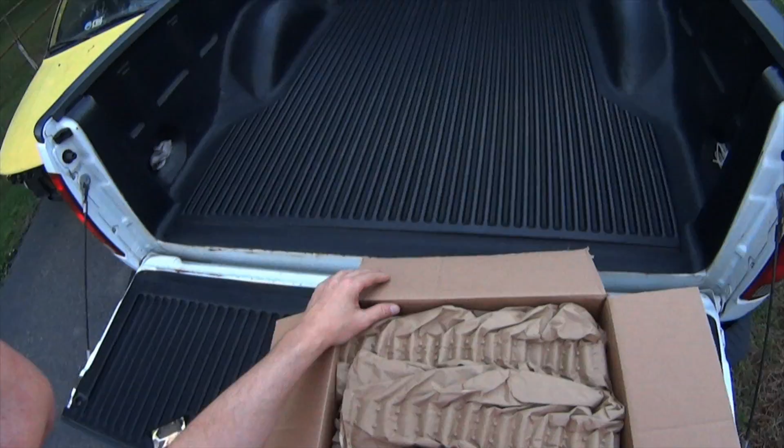The last video ended when the tape drive in my main production camera failed. The solution I chose was to ship it to the manufacturer to be repaired properly. It wasn't cheap, but it wasn't anywhere near what I was expecting, and it was less than a quarter of what this thing would have cost to replace. I'm really excited to have it back, and so is Caboose, because it means more wet food.

My estimate came in a week earlier than quoted, and the repair also happened a week earlier than quoted. Because of the expedient manner in which my repair was handled, I'd have paid any price just to get back to making videos again.

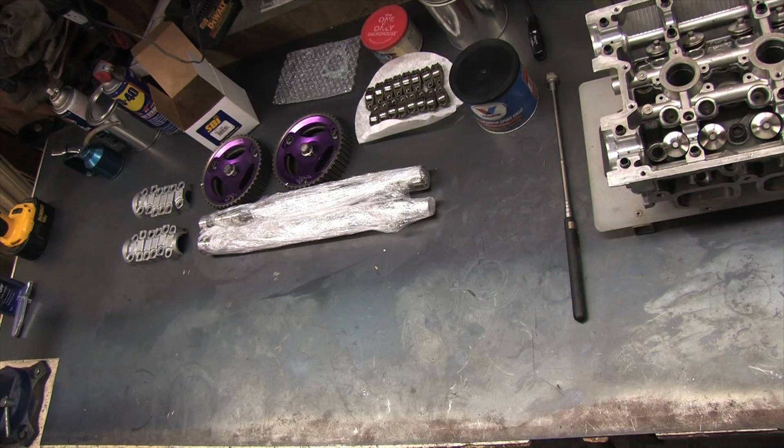The first matter of business, though, is to see what I can salvage from the 2 tapes I shot prior to the failure. This footage is what remains, and I've decided to go ahead and use it despite its segmented nature.

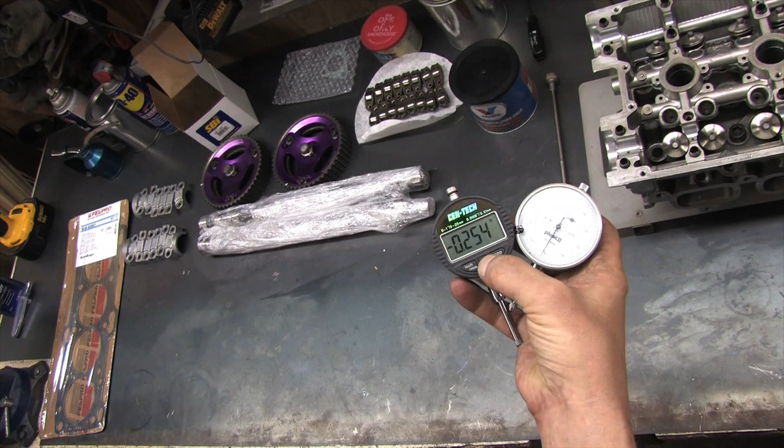I was laying out some parts and tools I was going to use for several upcoming tests, like my Felpro Permatorque head gasket, a couple of dial gauges, some straight edges, some feeler gauges, a digital caliper, some magnetic stands for the dial gauges - I have a few different kinds - and a set of test springs from the local hardware store. I found these to be a perfect fit over the valve stem seals, only 1 pound of pressure each. I'm saving them for another video though.

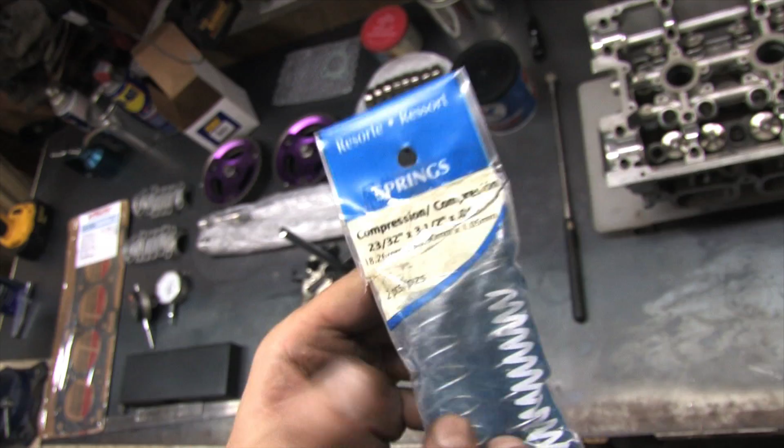Don't ask why I've got Romex and dikes. Builder's choice, I guess. You'll see soon enough. I've got my crank pulley, and it's useful for what we're about to do.

Can anyone guess what this imaginary part might be? Because it's not here yet, I'll save it for the next video. Make sure you have your crank pulley bolts cleaned up and ready to go.

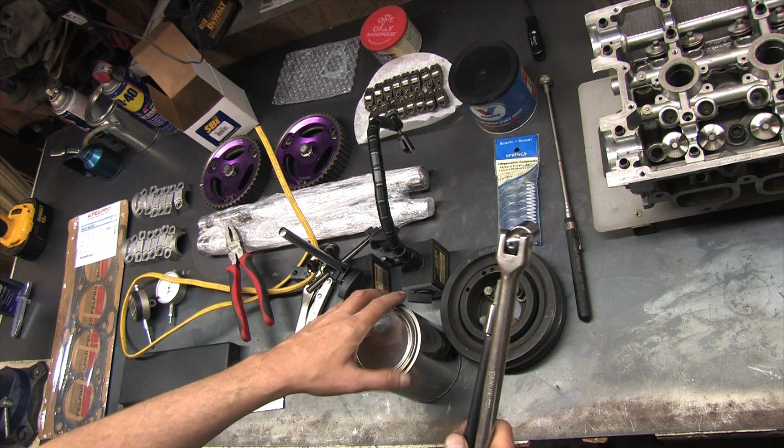In the next video, we're messing with head bolts, so I've got a 10mm Allen head socket that fits the factory bolts. If you're messing with a 6-bolt, this is another tool you have to own. Grease? We don't need no stinking grease.

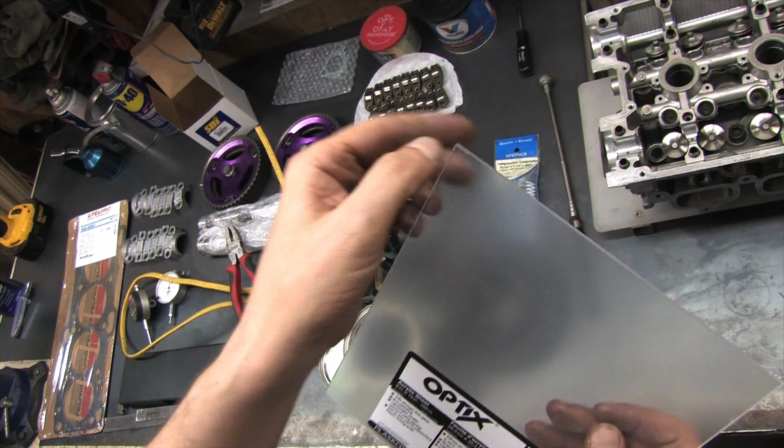I also bought a piece of plexiglass when I bought the springs, but then there's this particular item picked up from the aviary aisle of my local pet store. They wouldn't put this on it if someone somewhere didn't use this for the wrong hole. I just need the graduated syringe, that's all.

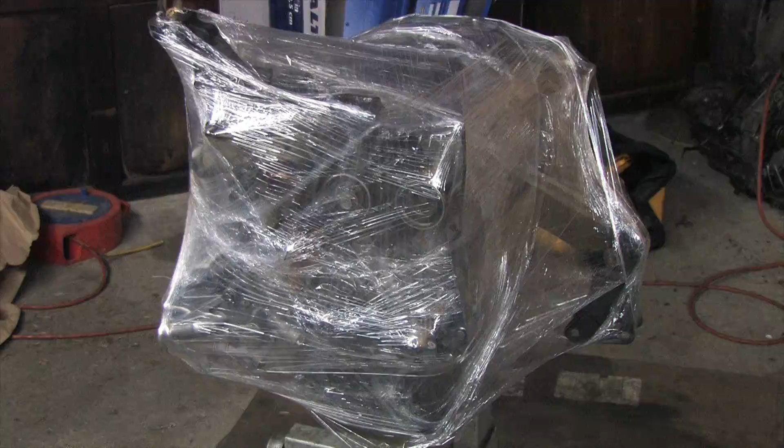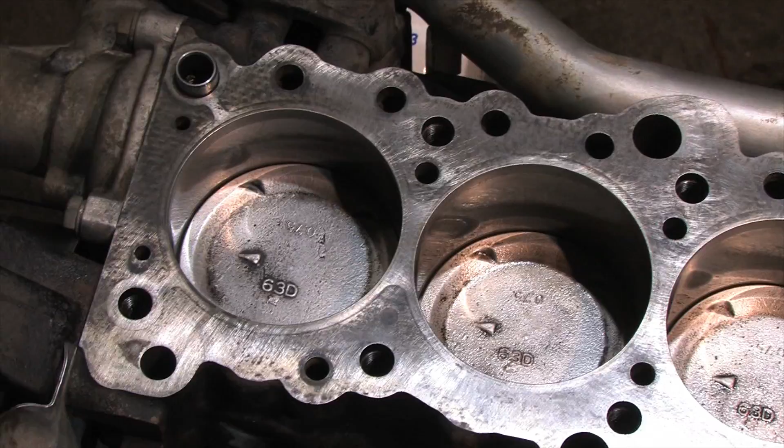What we're going to witness today is what you need to do if you want to calculate your compression ratio. Your pistons aren't the only factor that determines how much compression each hole produces. Parts selection, as well as machining performed on all of those parts collectively, are what determines what each hole is going to make. In order to calculate your compression ratio, you need to know several specifications for your parts.

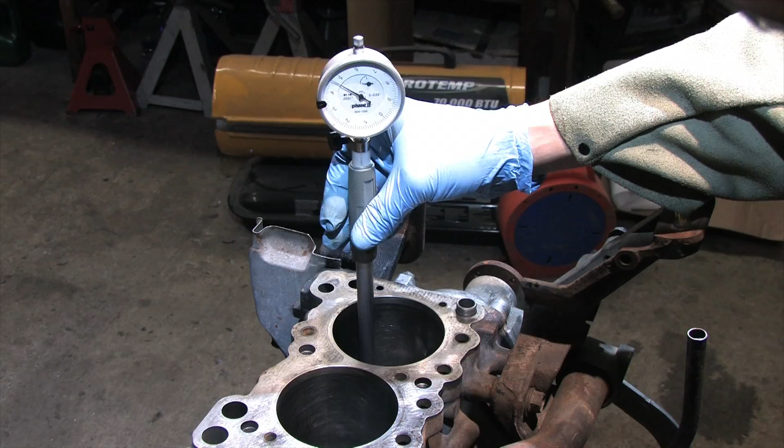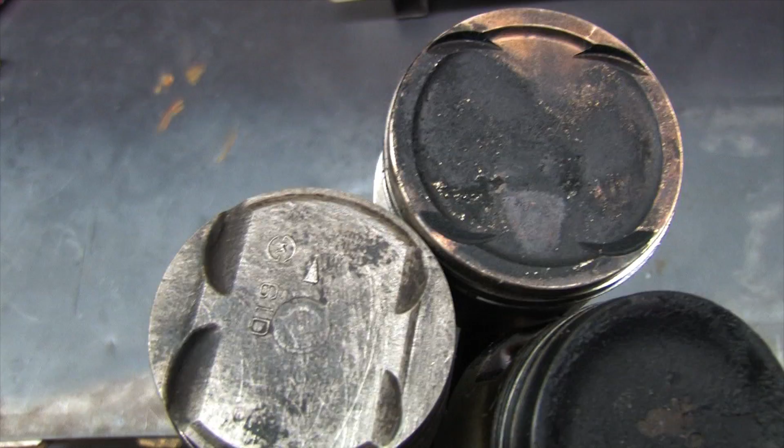You want to have your bore, your stroke, your head gasket's compressed thickness, where all the pistons line up with the deck surface, the dish volume on top of your pistons, and the total combustion chamber volume. Some of these numbers are easier to measure than others depending on how you feel about doing math, but we're going to keep it simple so that anyone can do this with their parts.

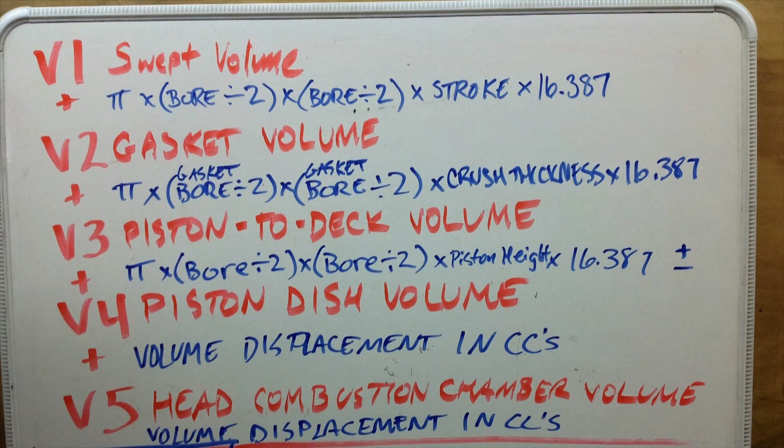These are the variables in the equations that we need to solve in order to calculate the compression ratio. You'll notice that all of the calculations involve the exact same formulas - they just use different variables. We need only to fill in the blanks.

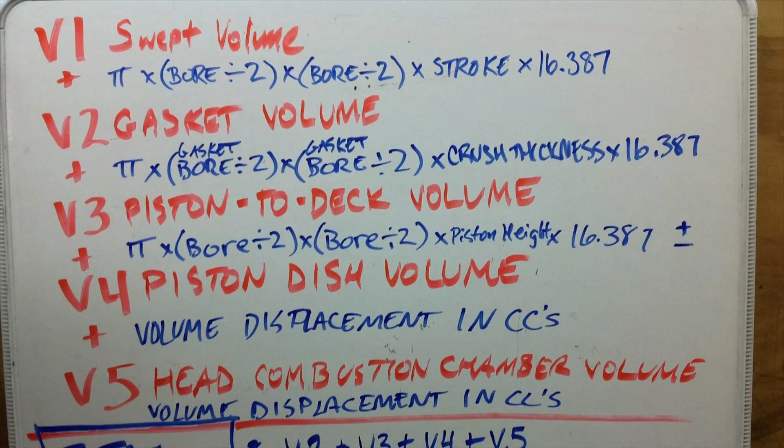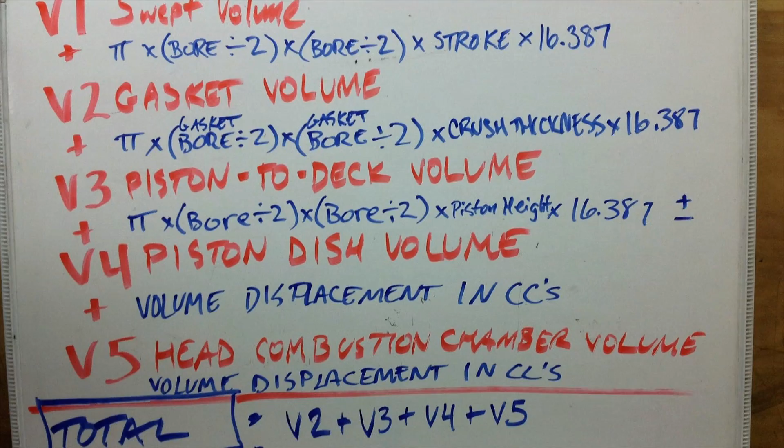Swept volume is your engine's calculated volume based off of its bore and stroke measurements. I know both of mine already and will save the calculations for later. Add to that the head gasket volume - you calculate your gasket's bore diameter area times the crushed thickness of your head gasket to get the volume of the gap between the block and the head.

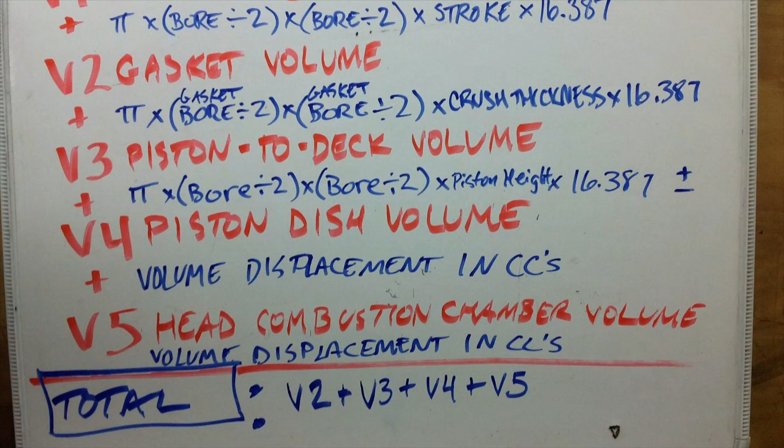Then add the piston-to-deck volume. This is where the piston lands relative to the block's deck at the top of its stroke. If it lies below the deck, the volume calculated is positive because it adds to the volume of that particular bore. If it lands above the deck, then this number subtracts from the deck volume, making it a negative number. You use the bore diameter here in your math for the piston-to-deck volume.

Piston dish volume is relative to the shape of the pistons you're using. Dished pistons provide positive values, and domed pistons may provide negative values. It depends on what their fly cuts look like. All measurements are easiest to calculate in cubic centimeters.

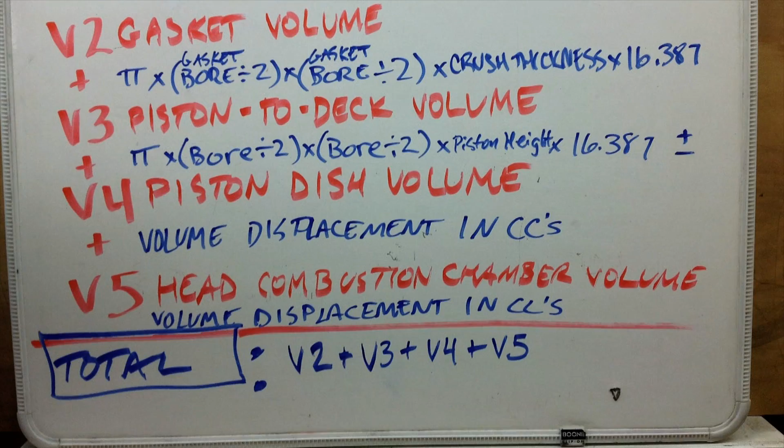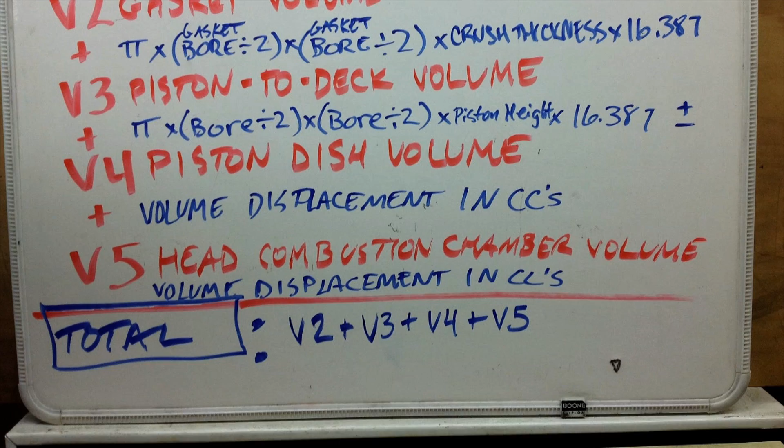The last thing we want to know is the volume of the combustion chamber that belongs to the head. That's V5 in cc's. These are all measurements that when added together yield the total combustion chamber volume when that cylinder's piston is at top dead center. The number to the right in our compression ratio is the volume of the combustion chamber when the piston is at top dead center. Let's take a better look at our volumetric equation because it's really just basic geometry.

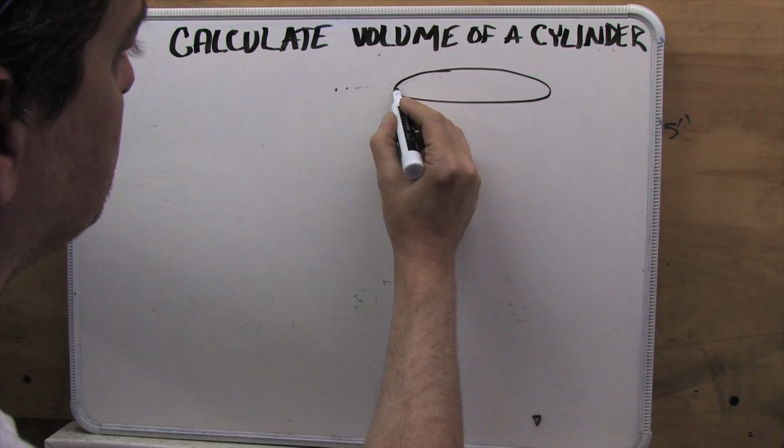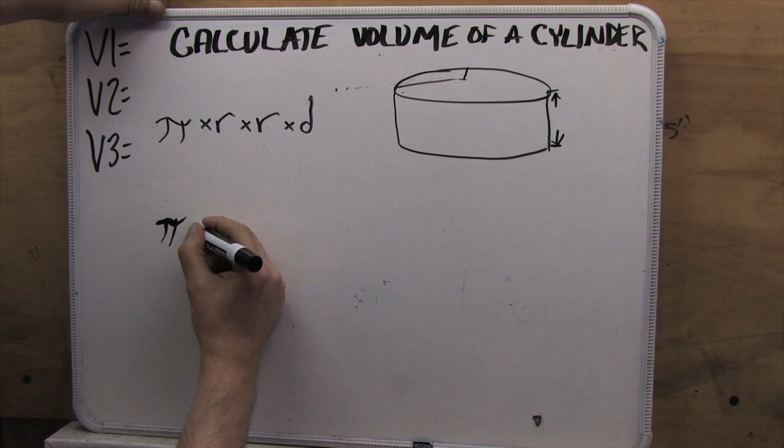To calculate the volume of a cylinder, you multiply pi times the radius times the radius to get its area in whatever unit of measurement you're using. Then you multiply it by its depth to get its volume. Three of the values you use to calculate the combustion chamber volume are perfect cylinders, so we use this exact same equation to determine the variables for V1, V2, and V3. Easy peasy.

Pi times the result of the diameter divided by 2 times the diameter divided by 2 times the depth. That gives you your volume. If your units are measured in inches, multiply that result by our first magic number, 16.387. I call this a magic number because it's an invaluable tool in this equation.

All of my measurements are in linear inches, so my volumetric results are in cubic inches. Multiply any measurement that you have in cubic inches by 16.387 and you get its volume in cubic centimeters, because there are 16.387 cc's in 1 cubic inch.

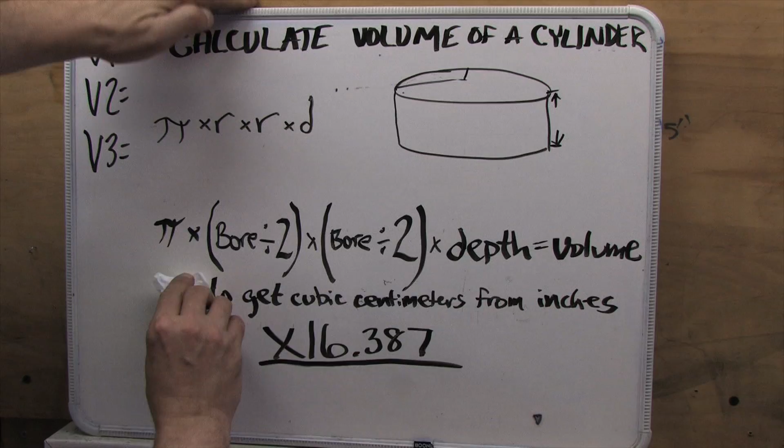There's another equation you can use that's simpler though. It's a technique referred to as slicing pi. It involves a second magic number. Instead of having to cut your bore in half twice, you divide pi instead. And a half times a half is a quarter.

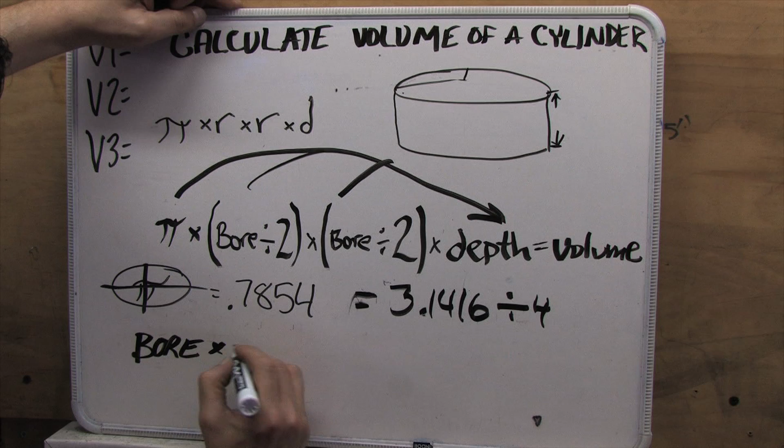If we move this portion of the math over and slice pi rather than the bore, then we get a second magic number of 0.7854. 0.7854 is a quarter of pi, rounded to a 10,000th of a decimal place. More than adequate for our mathematical needs here. Since pi is quartered, we don't need to split our bore measurements anymore, and the math becomes a much simpler bore times bore times stroke times 0.7854.

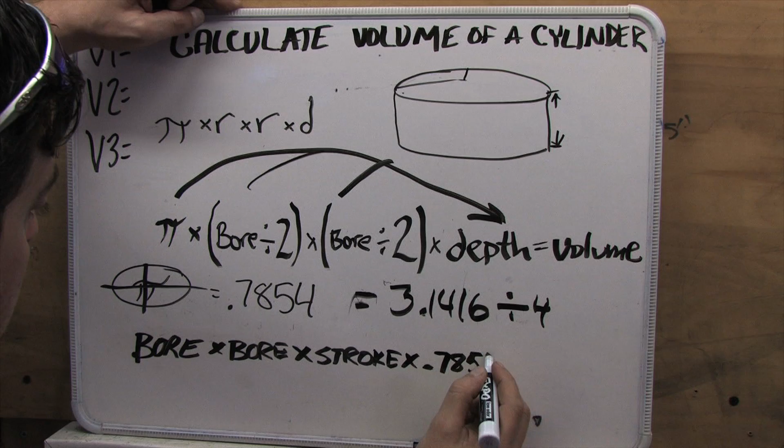If inches, times 16.387. You can use this formula to simplify your volumetric equations instead of the longhand formula. Just remember that all of these measurements need to be in cubic centimeters for the rest of the math to work. So convert any results that you have in inches.

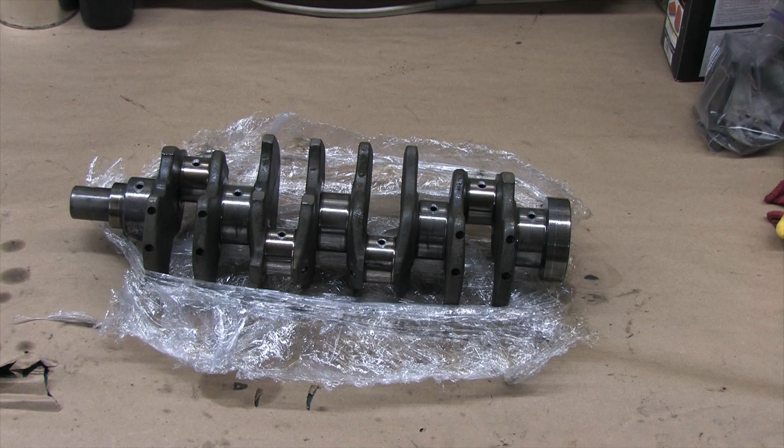Let's look at the bore and stroke. I already know these measurements because the 2-liter 4G63 crankshaft I selected has a stroke of 3.465 inches. And I already painstakingly blueprinted my rotating assembly in a previous video. For my example here today, we're just going to calculate cylinder number 2 for now.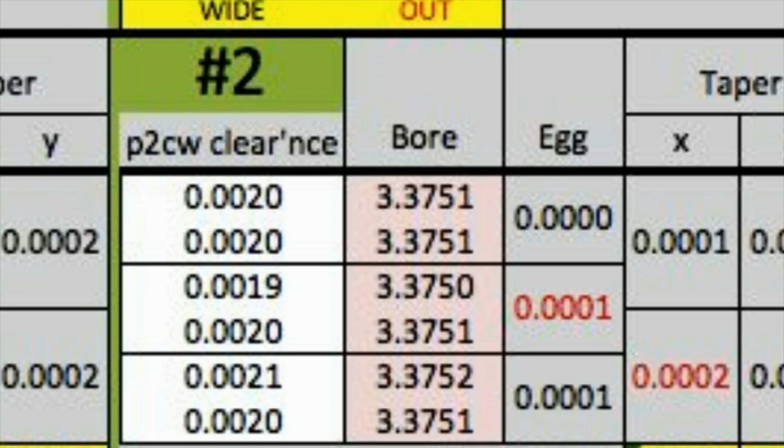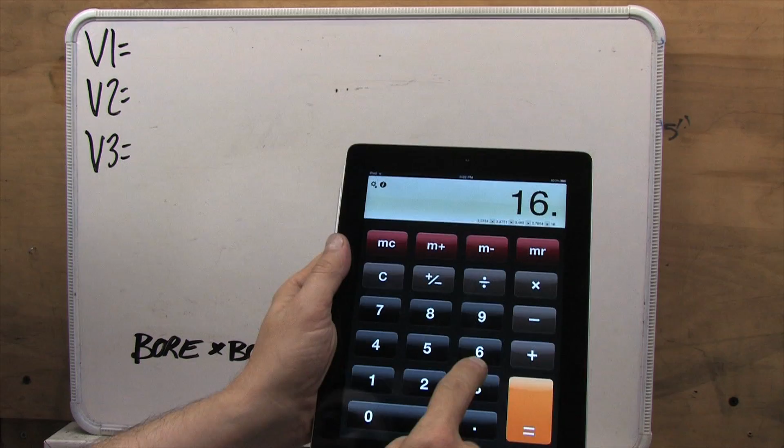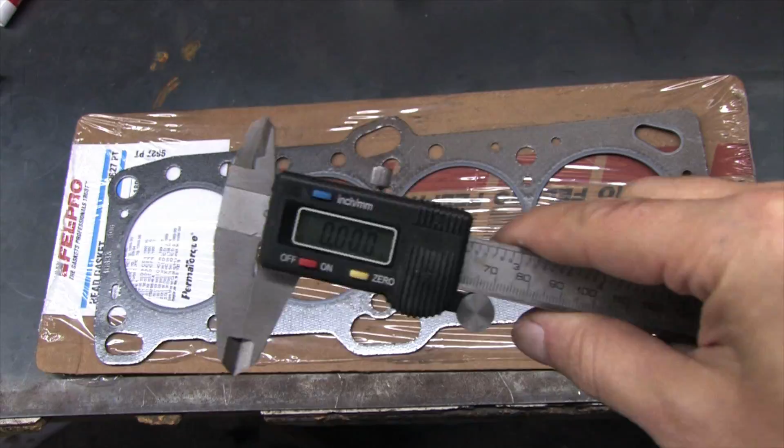For number 2, I measured 3.3751 inches. So 3.3751 times 3.3751 times 3.465 times 0.7854 times 16.387 equals 508.0037 cc's. There's V1. My head gasket is a popular choice and many people have already posted its diameter and crush measurements all over the internet.

I'm going to measure my head gasket, but I'm going to rely on known crush numbers from other users who have posted it, because I'm not ready yet to crush my head gasket.

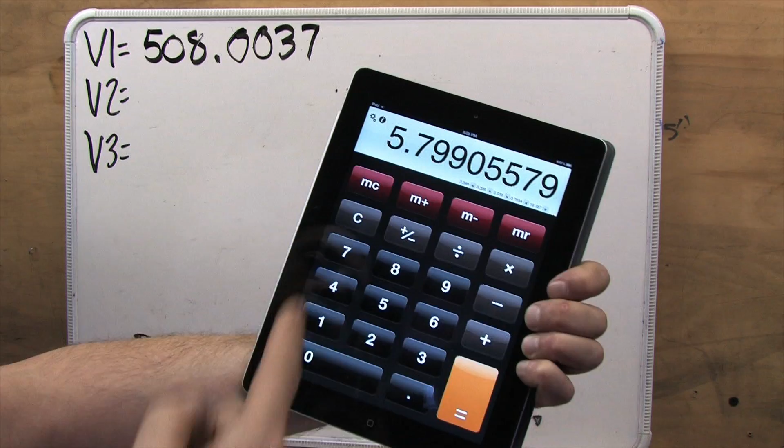Here we measured 3.399 inches in diameter. This gasket is known to compress to 0.039 inches thick, so 3.399 times 3.399 times 0.039 times 0.7854 times 16.387 for cc's, and we get 5.7991 cc's. There's V2. Now we're going to measure piston-to-deck height to calculate V3.

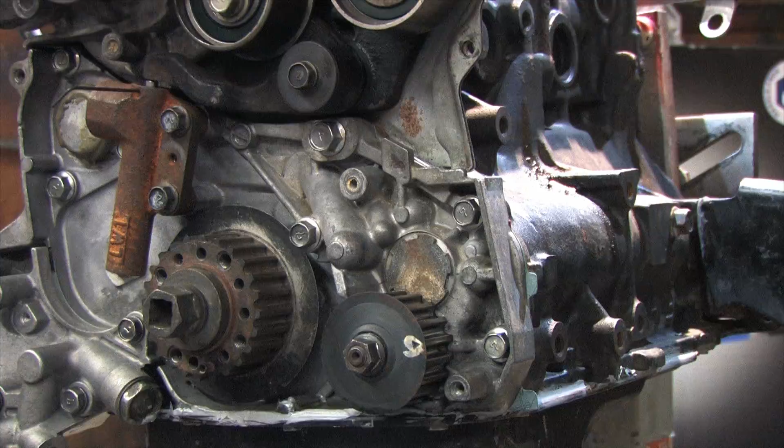I'm putting my crank pulley back on here to use as both a measurement tool and also to make turning the crankshaft a little bit easier on myself.

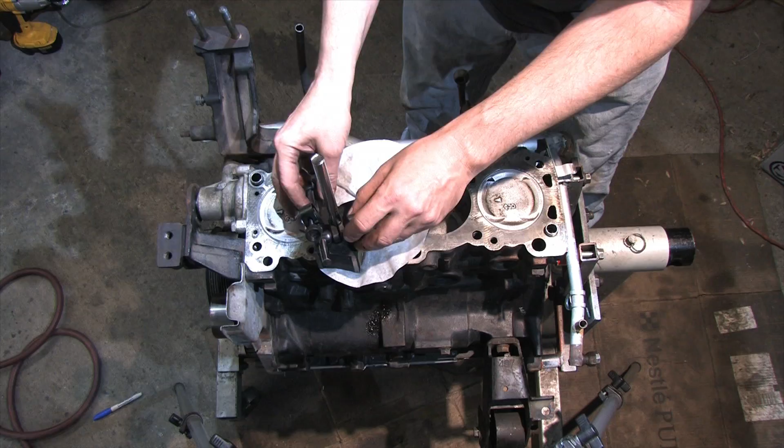We need to locate top dead center and bottom dead center to measure our clearances, because those are the only locations in its rotation where two of the pistons achieve their maximum height. I'm using my dial gauge swept through about half of its range at the highest point, indicating top dead center vertically off the number 1 or number 4 piston. To indicate bottom dead center of a 4G63, indicate the exact same way off piston number 2 or number 3. This works because the 4G63 has what's called a flat plane crankshaft.

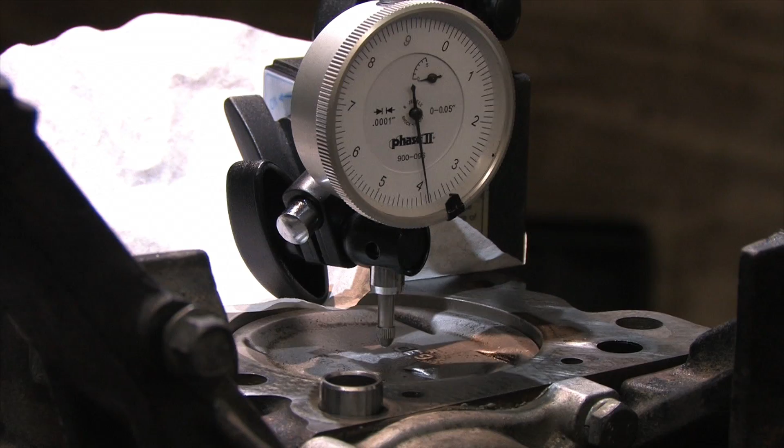The goal here is to turn the crankshaft until it measures the largest measurement you can achieve and stop. I rotate the gauge face to line up 0 with the needle so I can make several more passes to double and triple check my measurement. Once you've got it lined up, you've found top dead center.

I used Romex so I could get a bright, obvious copper wire to make the pointer with. I pulled the ground wire out of the bundle and bent it into shape with a pair of dikes so I could use any nearby bolt as an anchor, then bent it into position to line it up with the mark on the crank pulley.

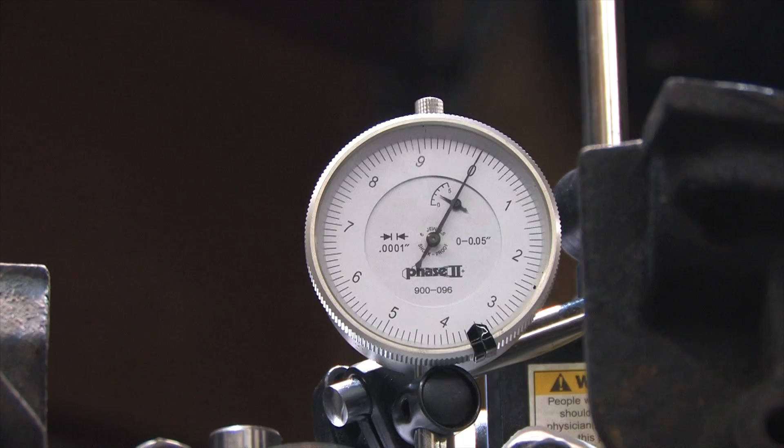At least for number 1 and number 4 you can do this. I lost the footage where we indicated off number 2, but you would just want to mark the pulley with a Sharpie wherever the pointer is after you zero the dial bore gauge at the highest measurement on number 2. With both 0 degrees and 180 degrees now known, you can inspect the piston installed height versus the deck.

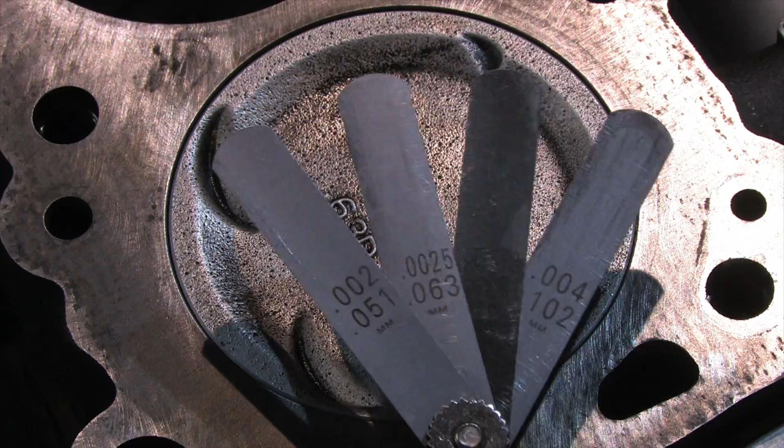For this, low tech works best: a straight edge and feeler gauges. You place the straight edge across both parts, and if the piston lies below the deck, measure between the piston and the straight edge, increasing feeler gauge sizes until you can't fit one of them all the way around the edge of the piston and deck. When that happens, it was the previous one that you measured with.

Right here on my number 1 piston, we find 7 thousandths because 8 thousandths doesn't fit. Write that number down.

Next, move on to number 4. Do the same thing until you find the right measurement. If there's any variation in the pin bore depth of your pistons, you'll get a different measurement from one piston to the next. It's best to check all 4 pistons because this is a common occurrence. This variation in piston-to-deck height is not as common in more expensive name-brand forged pistons as it is in these types of generic, no-name, non-hypereutectic, cast non-turbo pistons.

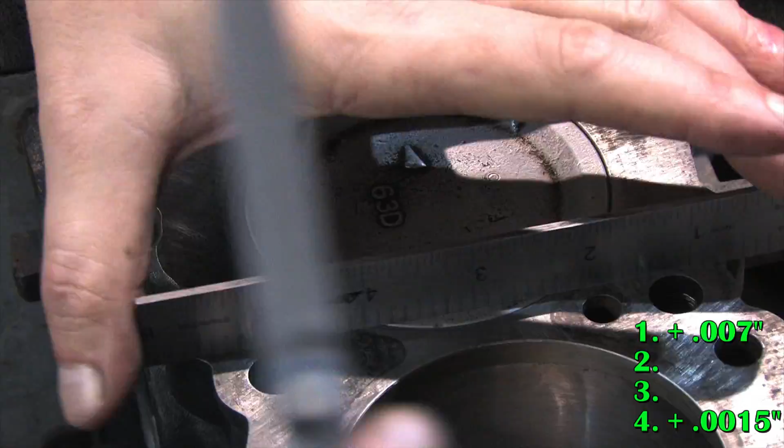But when there are differences here, you may see a variation in your compression numbers. Here I ended up with a 15/10,000ths feeler gauge and the piston below the deck. Write down your number 4 measurement. We're just getting started. Now you want to rotate your engine to your 180-degree mark and check the clearance again.

Here I find the number 3 piston actually protruding above the deck. In this situation you want to place the straight edge flat against the piston and measure both sides between the straight edge and the deck. Once you find the largest feeler gauge that fits between both sides of the straight edge on opposite sides of the piston, you have your measurement.

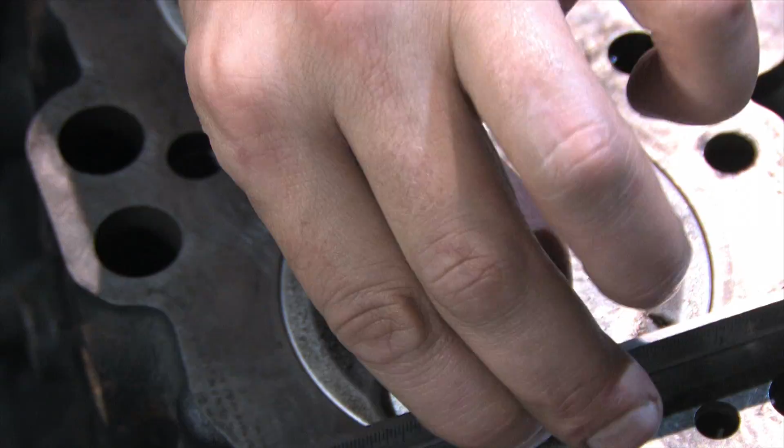My number 3 measurement was 3 thousandths above the deck. Write it down and move on to number 2. On number 2 I started with the 3 thousandths and it was too big. 2.5 thousandths fit on one side and not the other. What ended up working out for me was the 2 thousandth feeler gauge.

So now I have my piston height numbers. Positive is below the deck and negative is above it. You can see I have 9 thousandths of an inch difference in these pistons. These measurements are only one of 5 measurements used to calculate your compression ratio, and you can only get them by assembling the parts and measuring them.

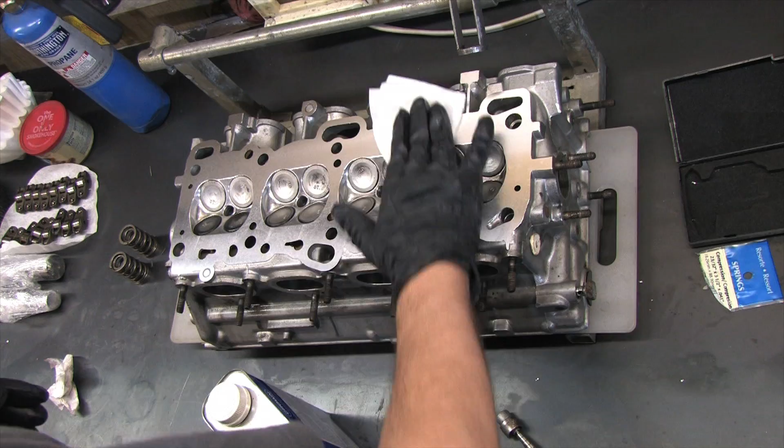There's another test necessary to calculate your compression ratio that requires assembly. After you have all your machining and modifications completed and the head assembled with no cams in it, you need to know your combustion chamber volume.

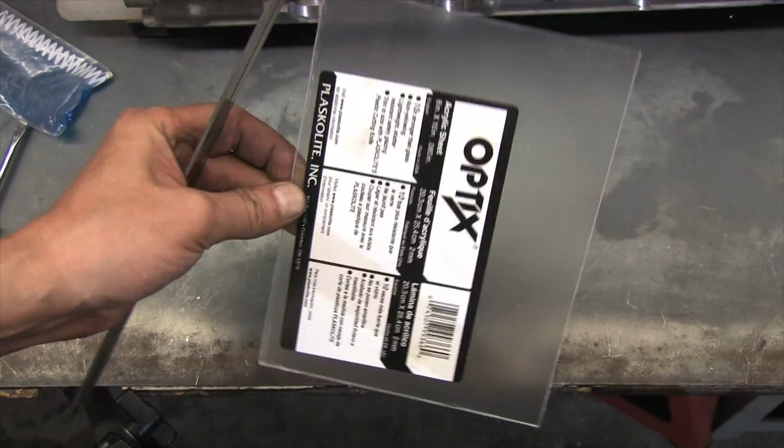Rather than do an immense amount of math, there's really an easy way to do this, and this is where my $2 piece of plexiglass comes into play. I like to cut a piece of it a little bit bigger than the combustion chamber, and plexiglass is really easy to work with. You can just score it with a razor and break it.

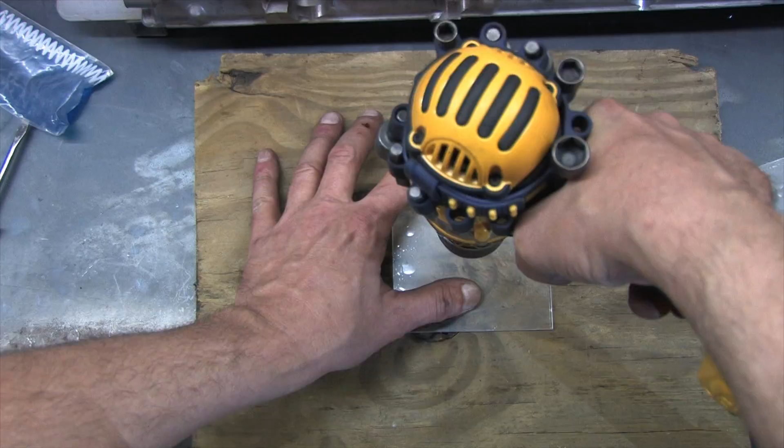Then I drill a hole in the center of it, placing a block of wood under the plexiglass as you drill to minimize distortion and protect your work surface.

I use a razor and scrape against the rough edges at a 45-degree angle to remove any overhanging material along the cuts, just sort of bevels the edge. Then I verify that everything's gone by following it with a fingernail.

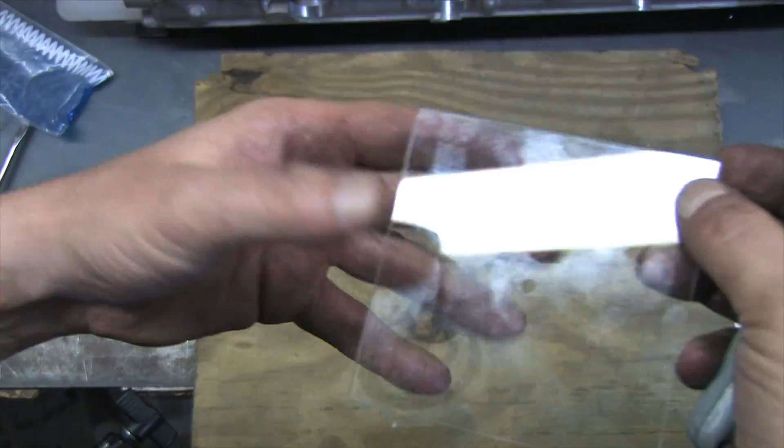An extra step you can take to produce a smoother edge would be to pass the edges through the flame of a torch. Small rough surfaces of this material will melt smooth. You just want to ensure that nothing protrudes below the large flat surfaces on either side of this tool. We're going to use both sides of it.

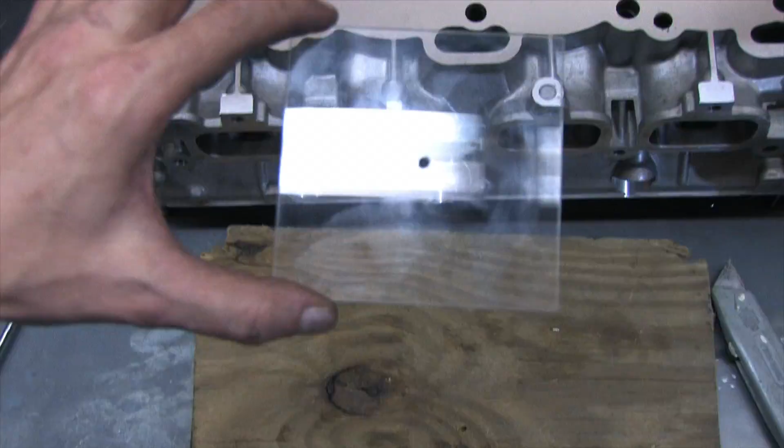Because the valves protrude slightly below the surface of the cylinder head deck, I like to make little fly cuts to accommodate the edges of the valve so that this plexiglass plate sits flush all the way around the edge of the combustion chamber. Also, because it's clear, it's really easy to see where to do this. Just make sure you don't move around between cuts.

Now that we have this handy little tool constructed, we need to seal up the combustion chamber with a spark plug. To keep the test practical, don't use a bolt for this, because a spark plug has a specific volume inside the combustion chamber as well.

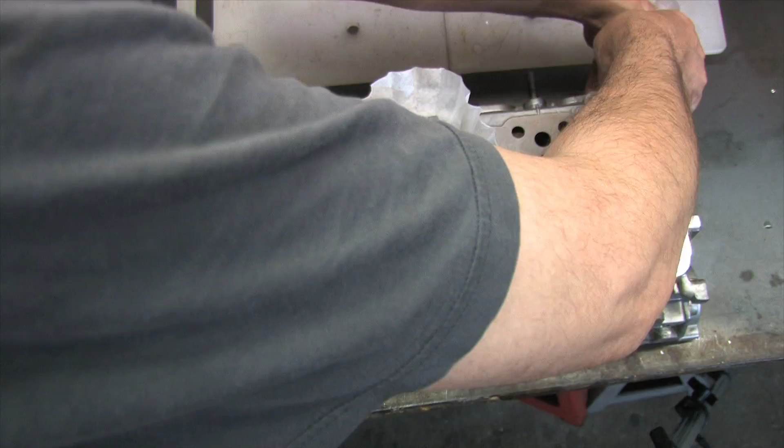Next we want to level the head on our work surface with the gravitational forces of whatever planet we're from, to begin our volumetric testing. I'm just using folded up coffee filters for this, and it doesn't matter what you use as long as you make it level.

With that accomplished, we're going to use a measured amount of water to displace all of the oxygen in the combustion chamber using the parts we have assembled, and it will give us the exact volume of the combustion chamber we're testing.

The graduated syringe I'm using has a volume of 10 milliliters. Because the combustion chamber is larger than 10 milliliters, I'll just count how many full syringe loads it takes until the combustion chamber is full.

Water has a pretty distinct meniscus, and you want to get down and eyeball it level with the deck, where it rises until it's even with the rest of the deck.

To ensure that you have it right, drop the plexiglass plate down on it with the reliefs facing the valves and see if there's any air bubbles. The hole in the middle is the relief to keep the plexiglass plate from floating on top of the water if you overfill it. I went about a quarter of a milliliter over.

Then we subtract what remains in the syringe from 10 and add that to the rest of our counts. This is the exact volume of this combustion chamber in cc's. You can repeat this test as many times as you like to get it right on every combustion chamber, but for the sake of clarity we're moving on, you get this.

Testing the dish volume on the pistons is a lot like what we just did with the head. First you level the block. It's easy enough to do on an engine stand because it rotates. After I've got my rotation right, I just use a few layers of cardboard under the wheels of the engine stand until I've got my bubble level straight.

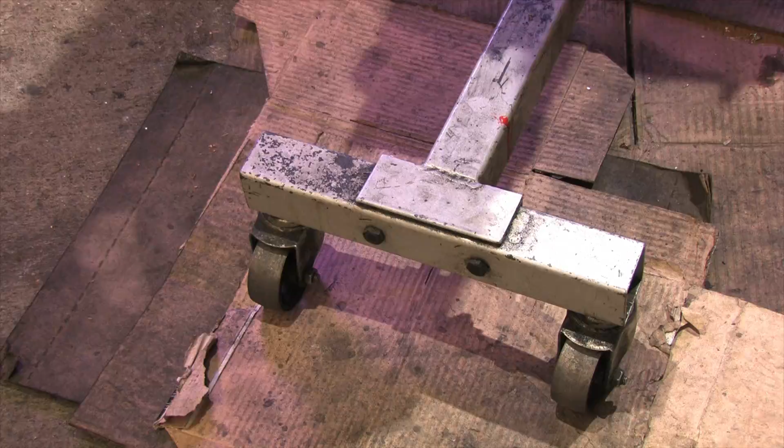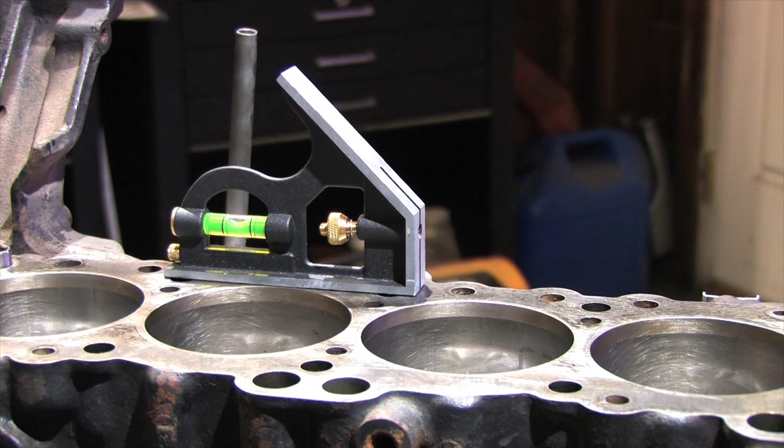Then I prepare my liquid medium. I'm sort of wasting my time here because it's well known that a 9-to-1 compression non-turbo stock cast piston is 10 cc's, but this is how the process works if you have an unknown dish volume.

All the pistons have one thing in common: they go in parts that can rust if you test this using water containing minerals, like tap water does. So I'm using denatured alcohol to prevent contaminating my block.

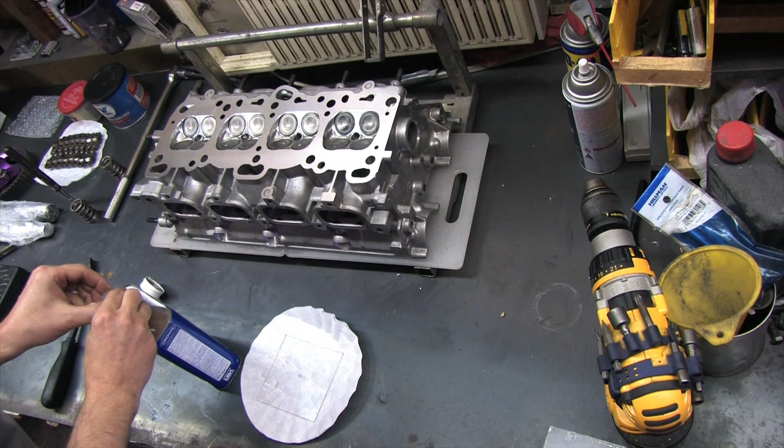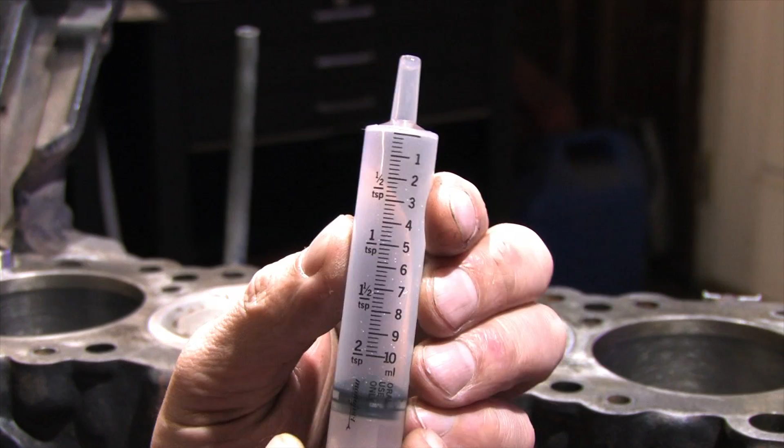Demonstrating this procedure with room temperature denatured alcohol is almost a waste of time because its evaporation rate is so fast that it's hard to get a precise measurement. Rubbing alcohol evaporates more slowly because it isn't pure, but it will contaminate your block. If you use alcohol of any kind for this test, freeze it first and do the test as quickly as possible. It'll slow its evaporation rate well enough to give you accurate results.

You can see how fast the air bubbles form under the tiny breather hole on top of our little test tool. I put exactly 10 cc's of alcohol in it, and enough evaporated to create those bubbles before I could cover it with plexiglass. Oh, you want your relief cuts facing up when you do this—I forgot to mention that.

Automatic transmission fluid works for this too, and it won't strip your piston-to-cylinder wall lubrication out, but it can be messy. If you use something that strips the cylinder and ring lubrication, remember to reapply a rust-inhibiting lubricant when you're done, and cycle the engine several times.

So here are all the numbers you need to calculate your compression ratio. My measured piston height is in the top left corner. I've got my head's combustion chamber volume measured for number 2. I've measured my head gasket diameter and borrowed the crush thickness from the community. We all know the stroke for a 2-liter DSM is 3.465 inches because the factory said so.

And there you've got, in the top right corner, my measurements from a previous video for all of my bores. To calculate V3, we need the piston height for number 2 as well as the number 2 bore diameter, and we once again practice our equation.

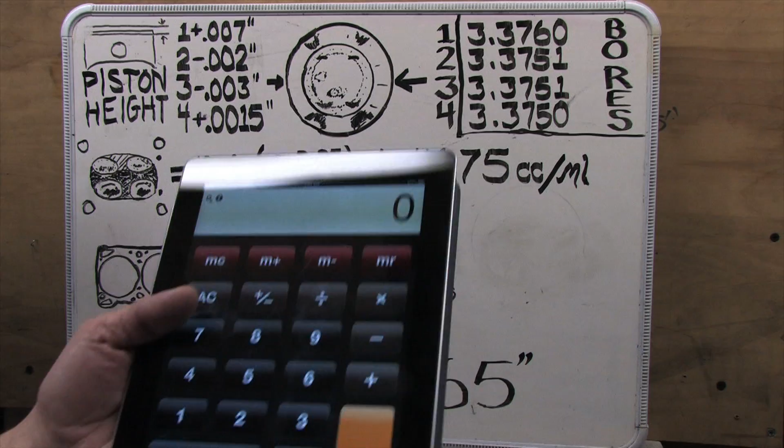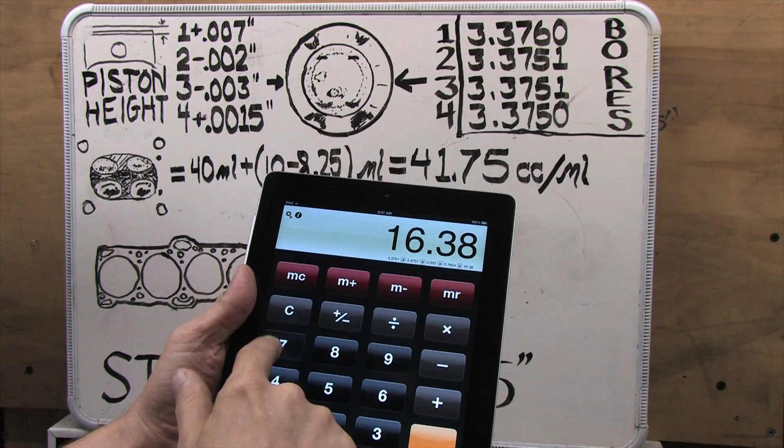3.3751 times 3.3751 times our piston height of 2 thousandths of an inch—and this is supposed to be negative, I don't know where that went—times our magic number 0.7854, and convert to cc's by multiplying by 16.387, and we get 0.2932. So I'm writing that one down on the board to help calculate the total combustion chamber volume.

At this stage we just use the results from our volumetric measurements and add them to the rest of the mix. Rumor stated that the 63D 9-to-1 compression non-turbo pistons had a 10 cc dish volume. My pistons were 30 over, but we verified it's still 10 cc's with the liquid volume displacement tests.

That's V4. V5 is the result we achieved with the head combustion chamber measurement. We measured 41.75 cc's from my shaved 40 thousandths, shrouded, recessed, valve-jobbed, polished J1 Hyundai cylinder head. The rest of what follows is the easy part.

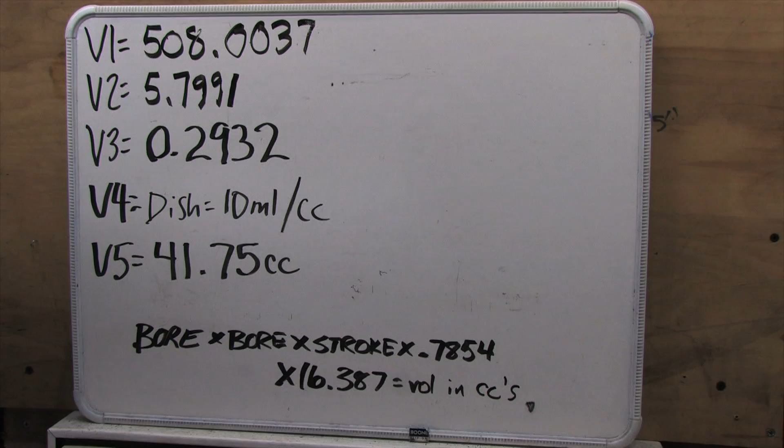Now all we have to do to get the front side of our compression ratio is add all 5 of these volumes together. So that's 508.0037 plus 5.7991 plus 0.2932—and that should be a negative number, remember, because the piston protruded above the deck, so negative.

Sorry about that, my bad. Plus our dish volume of 10 cc's, plus our head combustion chamber volume of 41.75 cc's, and we get 565.2596 cc's when the piston is all the way down at the bottom of the stroke. That's what that front number is.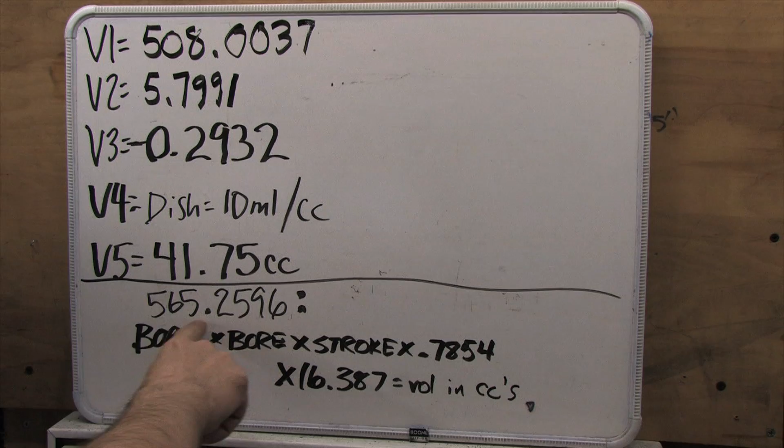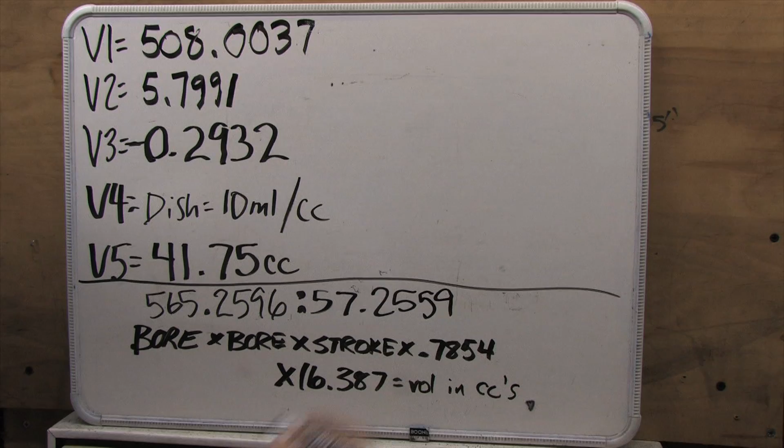The number at the top of its stroke is easy to calculate because it's the total volume minus the swept area, V1. To get this value, subtract V1 from your total combustion chamber volume, and you get 57.2559. That's the combined values for V2, V3, V4, and V5. If you want to check your math, subtract all those values from this result and you should get 0.

But we're not going to do that right now—we're going to finish the math because I don't want to distract you with that. To reduce the ratio, you divide both sides of the equation by the denominator, because a ratio is basically just a fraction. When you divide any number by itself, you get 1.

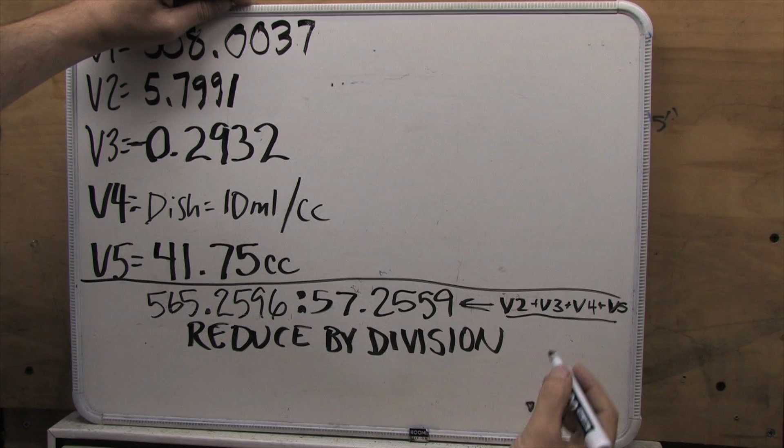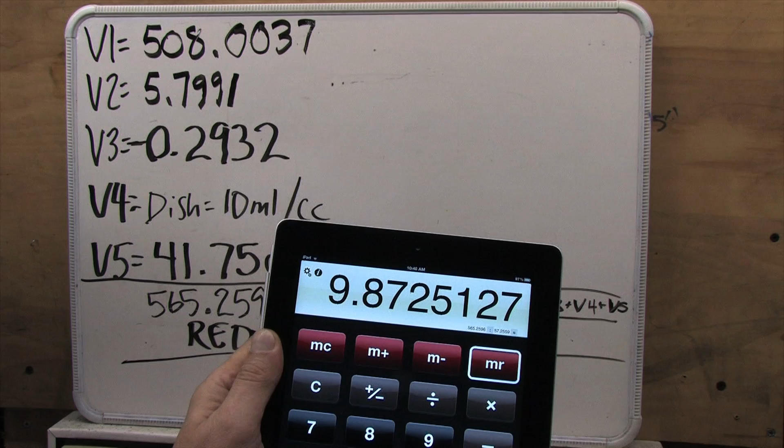But on the front side, we divide the total combustion chamber volume at the bottom dead center position by the total combustion chamber volume at top dead center, and we get 9.8725. That's our reduced compression ratio for the front half of the equation.

This is the number everyone talks about. There is no real way to determine exactly what your compression ratio's potential is without taking the time to do this kind of math and measurements, using real measurements that reflect all of your parts.

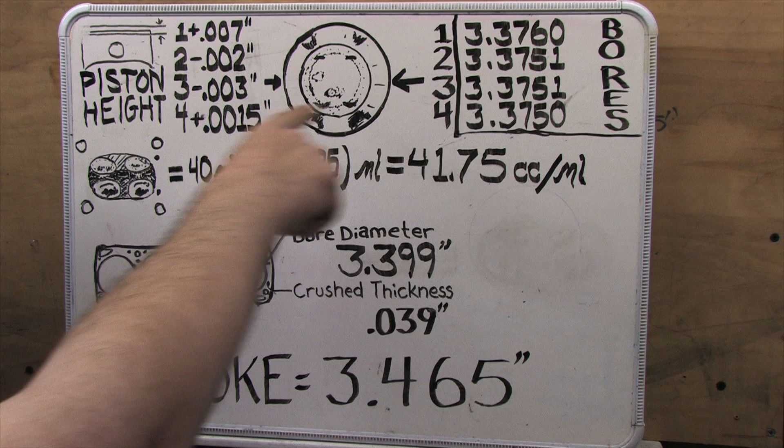My variables change from one cylinder to the next, so there would be variations in my results. If I wanted to take this to the next level, I'd measure every combustion chamber and every cylinder to complete my total displacement and compression ratio, but these numbers have given me all the information I need for now.

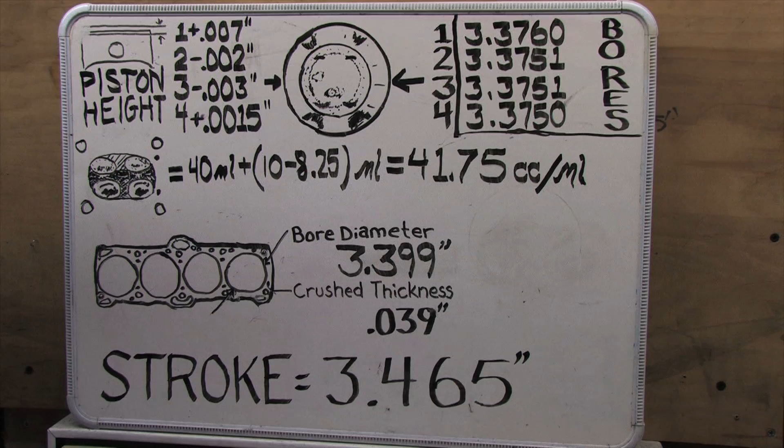Hopefully this example sheds some light on the math behind this portion of your tuning. If you know how to use this formula, you don't need expensive software or even online compression calculators to get these numbers—but by the time you do it once, you'll never forget how to do it.